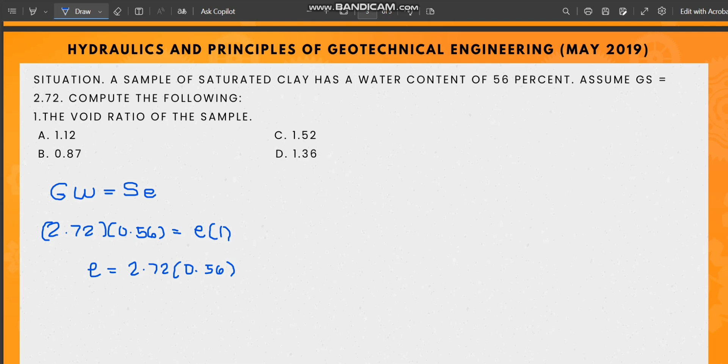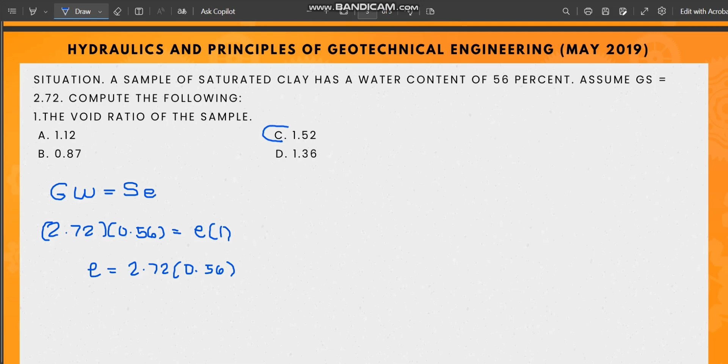2.72 times 0.56, and the void ratio will be equal to 1.52. So, this is the answer for the first item. For the next item, let's move on. The second question will be: what is the saturated unit weight in kilonewton per cubic meter?

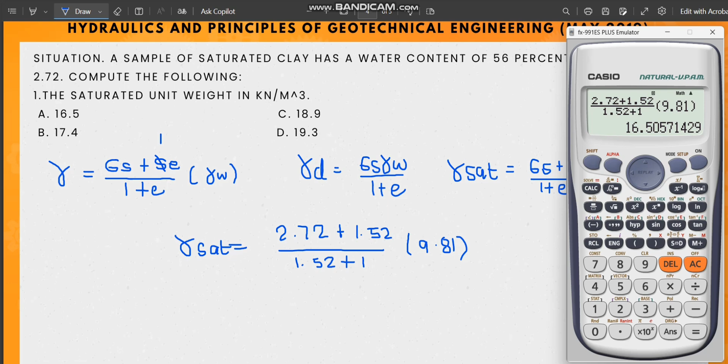2.72 plus 1.52 over 1.52 plus 1, multiply by 9.81, and the answer will be 16.5, which is letter A. So this is the answer for this item. So 16.5.